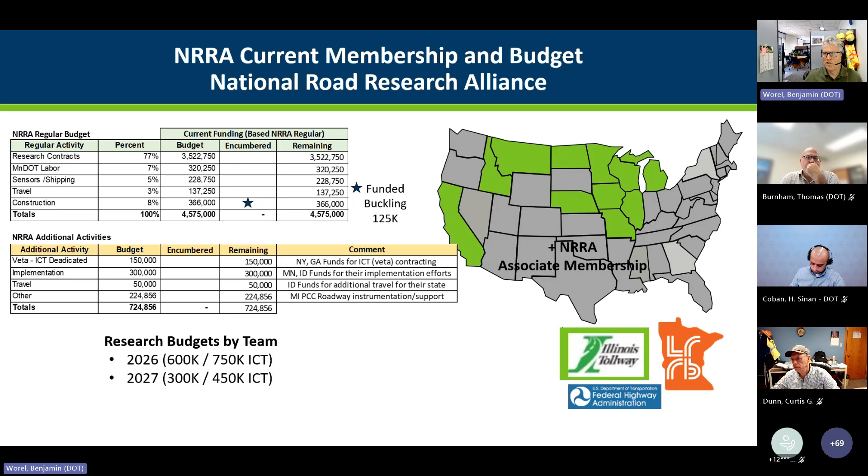These are the ones that we're able to fund with the money we have. Again, we have limited funding, so we can't fund everything, but we're funding quite a bit of things. So we'll go through that today. The ones that are not on the list are being held back again for maybe this spring to be funded at that time, so some of we weren't quite ready to do, either timing wise.

So we're just presenting what's going to be going out for RFP type of contracting. But again, the executive team is going to be reviewing these August 4th. And I think since the chairs have done such a great job, I'm not sure what they're going to argue with here, but we want to talk about other things. August 4th we'll have a meeting for these topics, but also other topics like I mentioned.

So basically, again, we're developing the ideas, the needs if you want to call it. The proposals basically come August, there'll be an RFP advertisement being sent out, so at that time different universities, consultants, whatnot can look those over and see if they're interested and want to put in a proposal on those. So we're giving the universities about 4 weeks to get the proposals in. Come September 18th, they're due.

So with that said, here's kind of what we'll be talking about today.

I think these numbers are right, it's funny how it's hard to count numbers, but you're going to see a lot of high mod reflective cracking over asphalt and concrete. You're going to see some structural design of high mod. I think the 2020s is the decade of high mod. It seems like here for NRRA, but it is a good mix, and Kurt will talk more about that.

And then some innovative mixes that we're still holding out for 28. Some of the sections we're holding out for 28 because those sections aren't quite ready to be done yet. We haven't seen the cracking that developed, reflective cracking for example, in some areas, and the recycled materials.

We're talking about doing high mod on shoulders to get some additional tonnage. We're talking about concrete. Tom will talk about different ideas related to how many dowel bars you need. Can you reduce those? Can you use smaller diameter dowel bars? Different alternative cements. There are still different materials out there that we'd like to try.

Tom's favorite one is the windmill blades. He hates them, he wants to grind them all up and put them in concrete, so more power to him. And then concrete recycling, how do you take a road and recycle that concrete back into a road, both in the concrete and the base? Geotech has really been talking about drainage systems.

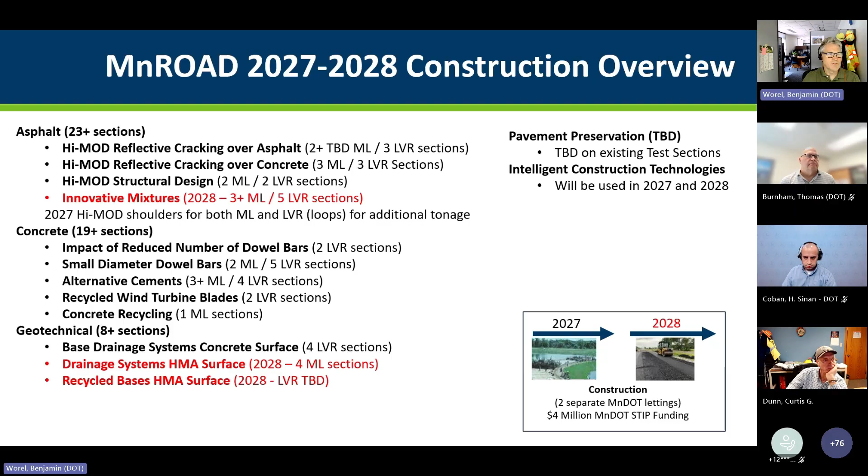Yes, any questions or anything I missed from the chairs? I think the next slide gets into the flexible team and the Kurt Dunn show.

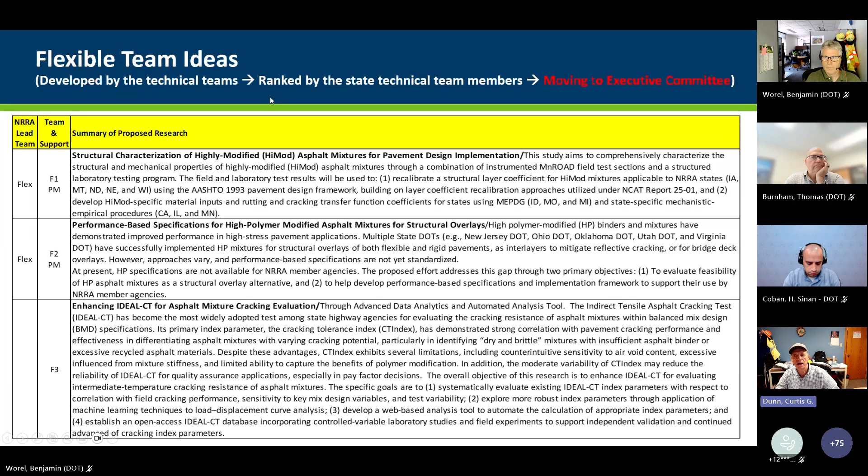So if you want to go to the next slide, Ben. The first slide here is basically dealing with reflective cracking with the high mod. We've got 2-inch, 3-inch, 5-inch, and 4-inch overlays that will be put over 4 sections in the current reflective cracking study that are going to be milled up, and we're going to put these overlays over those areas. They're about 450 feet apiece, and that would be the first segment there on the main line.

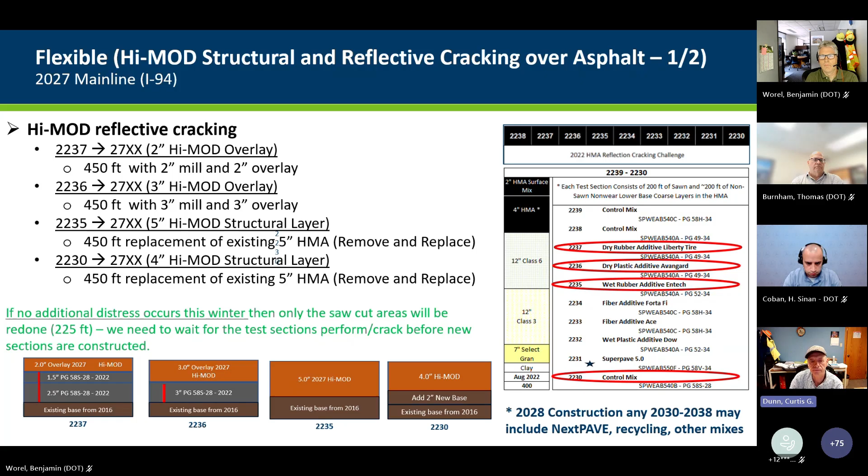Let me go to the next slide. And Michael, please, if you've got something to add as we go through here, go ahead. So the second slide here is high mod reflective cracking over asphalt and concrete, 2-inch. Mill existing and replace with 2 inches of high mod in that area, and then a couple of 1-inch sections over open graded friction courses. So one will be over the existing PCC, and another over existing HMA.

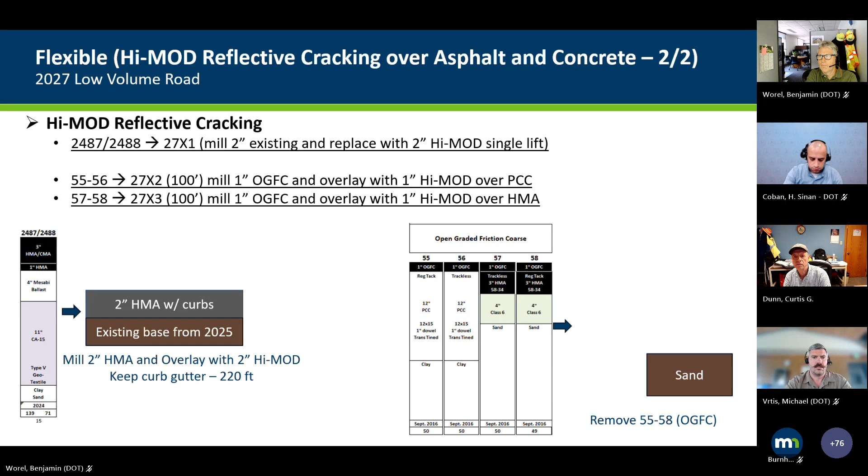Next slide. Okay, here's one on a low volume road yet. So here's some mainline overlay on mainline concrete, some 1-inch, 3-inch, 2-inch, as you can see, and then over to the right there, high mod on low volume road over the existing concrete there, 1-inch and a 3-inch.

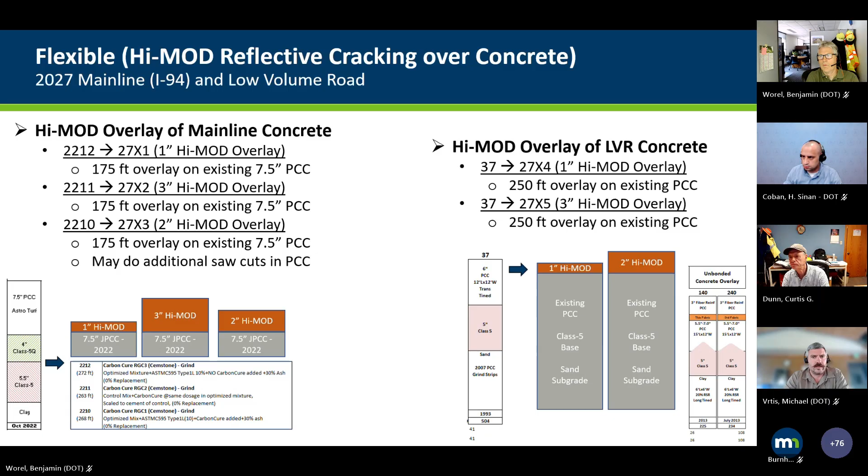Next slide. And then we've got some structural overlays as well. So we've got 4-inch over existing and replace with 4 inches of high mod single lift, and then mill 4 inches and replace with 3 inches of high mod single lift, and then the third one there, mill 2 inches existing and replace with 2 inches of the high mod single lift, and those sections.

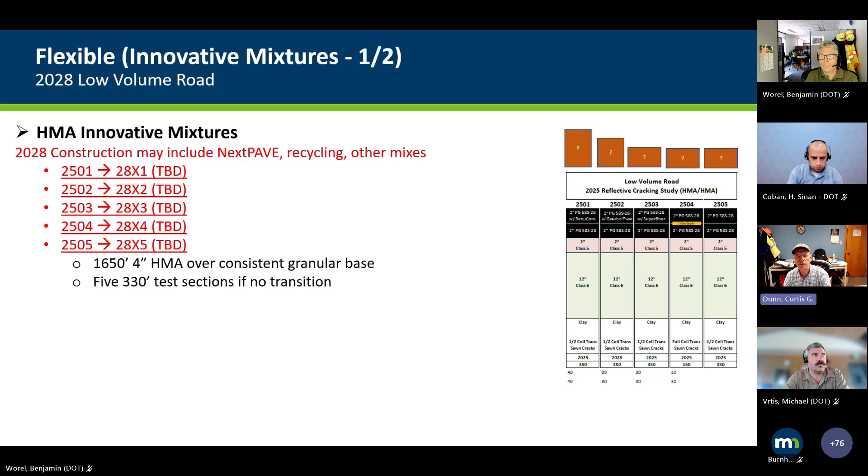So next slide, and then these are, as Ben mentioned, the innovative mixtures that could possibly go in 2028, which may include next pave, recycling, and other mixes. Next slide. Here's some more flexible, innovative mixtures again.

So these are on the main line as well. I guess we don't really know what the innovative mixtures are yet, but Michael, have you got any more you'd like to add?

No real clarifications or refinements. You did a really nice job marching through all the test sections, Kurt, and the design ideas. Just want to emphasize how we arrived at doing high mod next year.

The high mod 2 idea submittals were clearly the highest ranking ideas from the Flex team and the PM team. The overall urgency of the topic led us to push for construction in 2027 ahead of 2028. Both ideas we received were quality but had a separate focus, which spurred us to get a PM-specific deliverable and overlay focus, and a flexible team-specific focus on structural characterization and thickness properties.

Using the available interstate sections and low volume road sections, we're looking at doing that next summer instead of 2028. MnDOT and other agencies are having to face these design effort and challenges right now anyway, so with the NRRA we want to help with the initial design of the high mod mixes for agencies as well as the MnROAD construction effort.

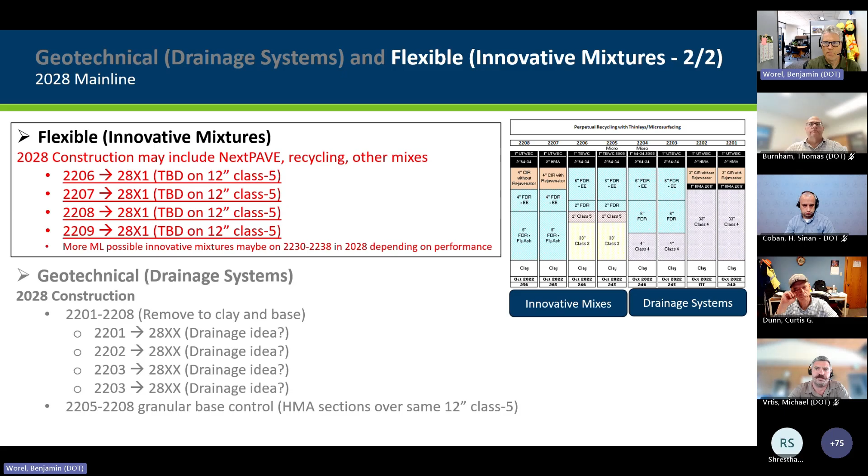Okay, thank you everyone. I want to repeat Kurt's thanks to all the NRRA members that submitted ideas. We got a plethora of them, both from states and associates, and we appreciate that. Double thanks to the state agencies that were under a tight timeline on how I handled this. Since we're under the gun to get ideas for construction next year, I asked for two rankings: one was what kind of test sections should we build, and the second was what kind of research should be associated with that, or other concrete-related research that's non-MnROAD that you're interested in. We just finished up the second round of rankings.

So again, I thank everyone at the state agencies for the very rapid turnaround we asked for. A couple general themes came out of this. You'll see studies related to dowel bar design - it's been a while since we've looked at that, and there are people with ideas of maybe being more economical or efficient with them. There's a theme of replicating experiments from other facilities, so you'll see some test sections related to that. That's a phenomenal thing - it's something the Flex team has been doing for a long time with NCAT, but it's nice that we see the rigid side now comparing similar sections in different climates. We have a continuation of alternative cementitious materials - they're still interested in new materials coming out to address lower carbon materials. And finally, a bit more on the recycling side, so you'll see some sections related to recycling.

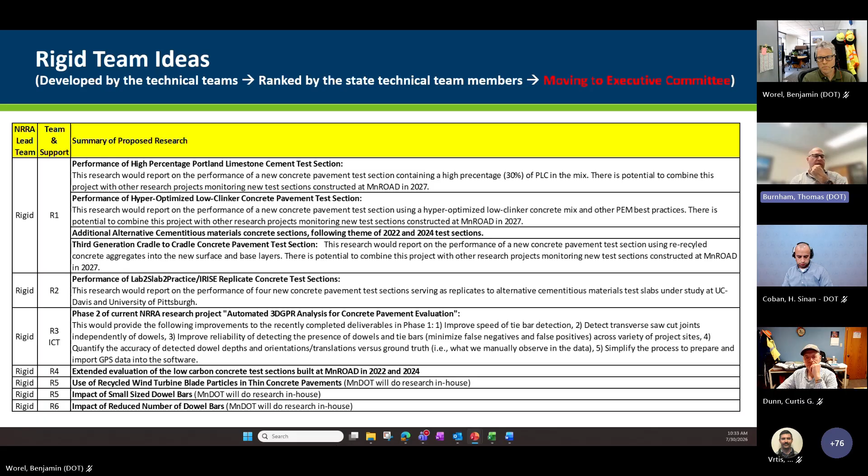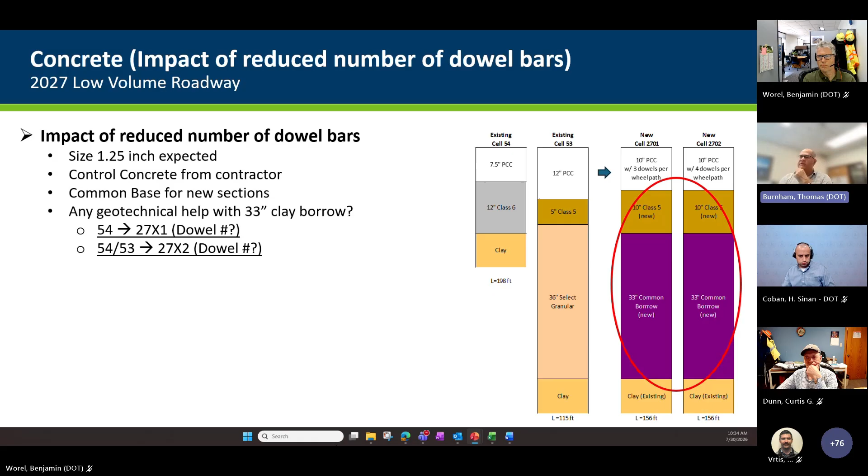Next slide, getting a little into the details of the test sections. Here I talked about the Wisconsin study—pretty robust sections—but again, we're trying to replicate what they're studying at the university in a smaller accelerated load testing situation.

Then again, the smaller diameter dowel bars—we're proposing a number of sections, shown at the bottom of the slide here. So again, just 6-inch pavement and really going small. We're talking about 1/2 inch, 3/4 inch. Do they work? Are we oversizing our dowels forever? Now that they're less corrosive, we have corrosion-resistant options—can we get by with a smaller dowel bar that's going to survive and not rust through?

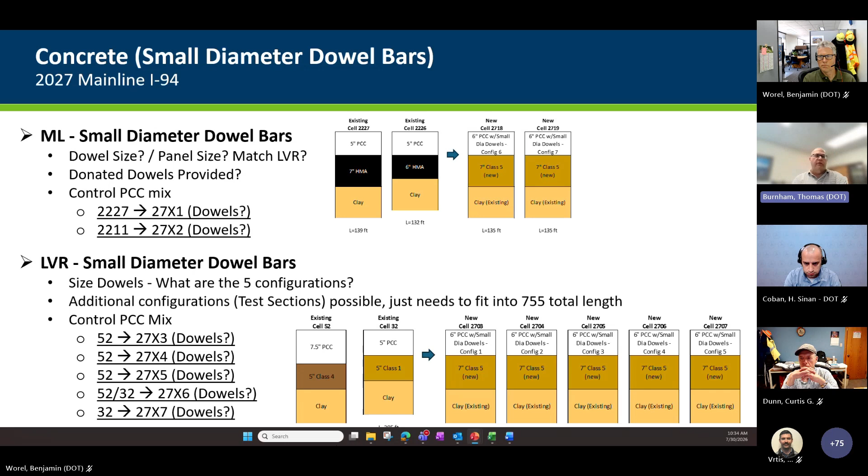And again, we're proposing that both on the low volume and then also very short sections on the main line, so we can compare heavy duty loading versus the MnROAD truck.

Then again, we're talking about alternative cementitious materials, and this is where we can do the lab-to-slab comparative replicate sections. UC Davis has some sections out there—we're going to replicate them here. The University of Pittsburgh is interested too, and they've done a number of lab studies; they'd like to have the slabs looked at here. So we have some of those sections on the low volume.

And then on the main line, again, we're looking at more new alternative cementitious materials. There's a new list out there, and we can choose from them. It's still up in the air whether we'll need to replace any of the sections we don't feel will be robust enough, so we're exploring—there's an unknown number of cells, is it 2 or 3 or 1? We don't quite know, but we have to decide pretty quick.

Again, recycled wind turbine blades—just going to propose comparing to the other sections that were out there when we were using more standard fibers. The 3-inch lasted maybe about a year; just to keep it in service we overlaid it, and about 7 years later we had 4 inches that lasted. So I'd like to replicate the robustness with a direct comparison between a 4-inch structural fiber from a manufacturer versus what this ground-up windmill blade will do. Hopefully it's a good experiment.

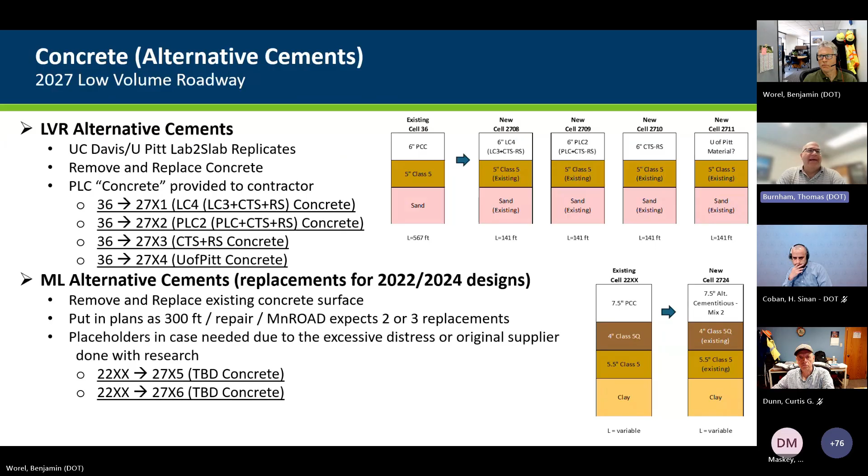Yep. Hey, if you go back, so one is a 30% Portland limestone cement, right? Another one is a low clinker cement. So what is the difference there? Looks like the same to me. I think it's the next one, Ben. There we go.

Yeah, we have to, because you are working with reducing clinker, right? You are replacing with limestone, right? Yep. So this was submitted by Iowa State, and I think they have some ideas. We have to work with them to define what the hyper optimized low clinker design looks like, but it will be different than the high PLC design.

I think a lot of the stuff you see here is just trying to figure out what real estate we have, and we still have a little details to go, like Tom mentioned. That'll probably be further discussion with the rigid group as you go. Is it something you would like to be involved in, on the TAP, to help understand and decide?

I'm looking from a sustainability approach. We are trying to reduce clinker, and technically you are using high limestone content. Technically, we're trying to reduce clinker, right? So I was looking at it a little differently.

I think the third one, the high PLC concrete, what that really means when it was proposed was 30% limestone content - not 30% 1L, but 30% limestone interground within the mix. That's what the third bullet is supposed to represent, versus taking a whole bunch of paste out, which is what the first bullet represents.

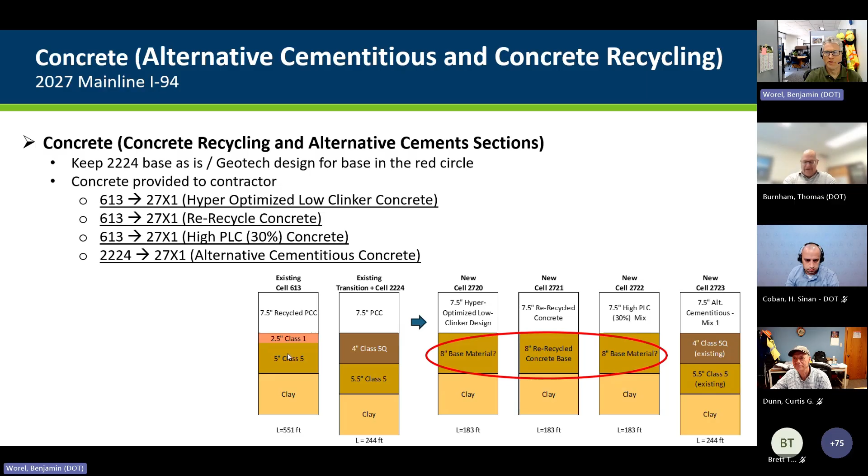Yes, all right. I'm going to just chime in that with 30%, I don't know if you'll be able to get there. Right. But they made the 20% for us also, Dan, when we wanted that. So if it's something we want, it could be considered.

But there's also 1Cs, and Nebraska's got some mixes out there that are going to be higher - the LC3s and the L2s. You're trying, in that top one, to replicate what was already built in these other states, right? So those aren't necessarily new. Some of the low volume stuff is the lab-to-slab stuff, and the Pitt. So we're just building what they built, correct?

Yes, for the mix designs. And then the others, I think that'll be the rigid group - whoever wants to be part of it would be part of those discussions. And some of these mixes too, I think we have a little time because we're going to provide the concrete to the contractor.

We're not going to have them bid that. So in our special provisions, we say we'll get you the concrete, you pave it. But the people are still going to have to test it, so the more time we can give them, the better. You'll figure it out, Maria. All righty, thank you.

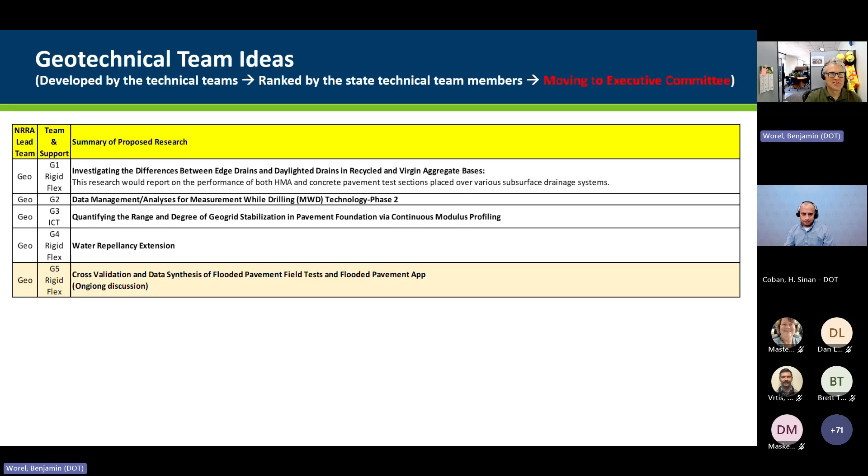I also would like to thank the NRRA members for submitting, reviewing, and ranking research and construction ideas. In total, we had 26 geotech-related ideas to review and rank. In this round, we selected 4 of them. G1, G2, G3, and G5 are selected for contracting in 2027. G4, water repellency extension, was not on the ideas list, but it's a cost extension request for the ongoing water repellency project.

There are some other ideas that also ranked high, but we have decided to postpone them until the additional $3,000 becomes available. So in the next 5 minutes, I will give brief information about these ideas.

The first one, G1, investigating the differences between edge drains and daylighted drains in recycled and virgin aggregate bases. This research will compare edge drains and daylighted drainage systems, and will also include the use of coarse and fine base layer aggregates, with 4 test sections - 2 drainage systems for each aggregate type, but the number of test sections is subject to change depending on the size of the area available for reconstruction. The main goal of the study is to evaluate how drainage design and base aggregate type affect drainage characteristics and overall pavement performance.

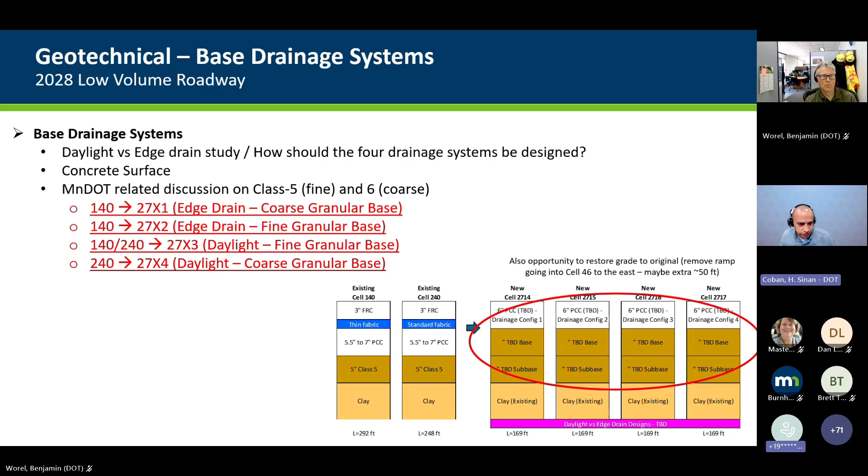So if you do it in 2027, we can use these two test sections, 140 and 240, to construct four new test sections. As I said, we will use coarse and fine base layer aggregates and two different drainage systems, but depending on the size of the area that's available for reconstruction, we may change the number of test sections.

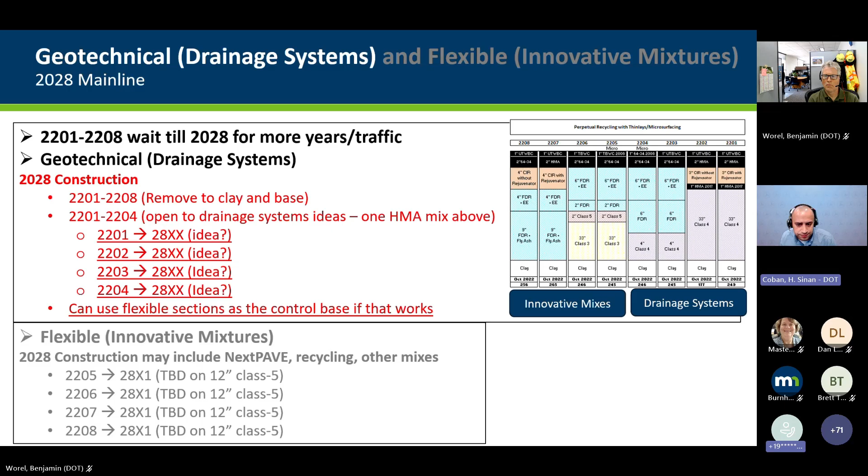If you do the construction in 2028, we can have 4 test cells to construct new test sections, and those are 2201, 2202, 03, and 04. These sections can be used to try different drainage systems and different base layer aggregates.

For the GeoGrid study, we can use test cells from 188 to 728 to create new test cells with different GeoGrids and instrumentation. Another thing we can try is using different RCA and RAP mixtures with different RAP and RCA proportions. I didn't include it in the ideas list I showed previously, but there was another idea submitted about increasing the RAP content in the RCA-RAP blend. Maybe that idea can be incorporated into the GeoGrid study test sections.

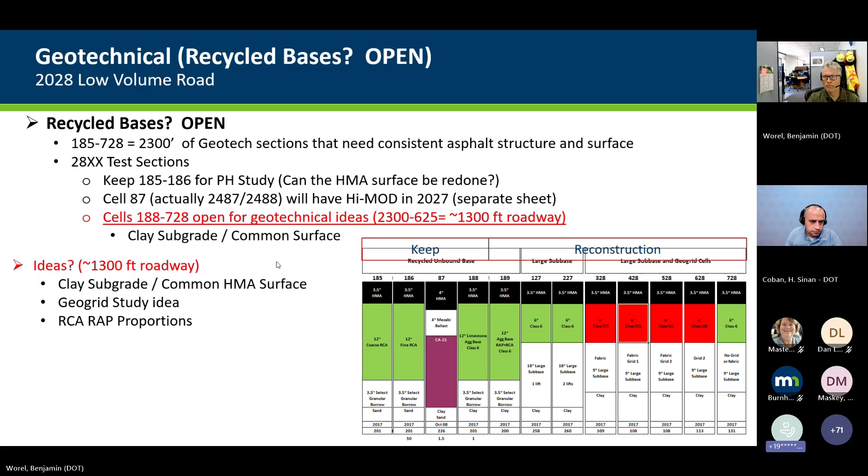Yeah, this is G2, the data management and analysis for measurement while drilling. We are in pavement foundation, looking very shallow. So why do we want to go there deeper?

My question is, I think we should focus on only the pavement section, not real geotechnical or bridge design topics. I think we did step away from traditional pavement research in this area because the geotechnical team members were really interested in pursuing measurement while drilling efforts. We've continued, but that question has been asked. We did do phase 1, and now it's getting proposed with a lot of support for phase 2.

Sinan, I was going to mention when we're done with all these, this will go to the executive committee. You probably noticed there's no dollars shown here. We didn't show those because the executive committee will look at the topics and the budgets that are set and see if they're appropriate. So hopefully that helps, Deepak. Thank you for explaining that.

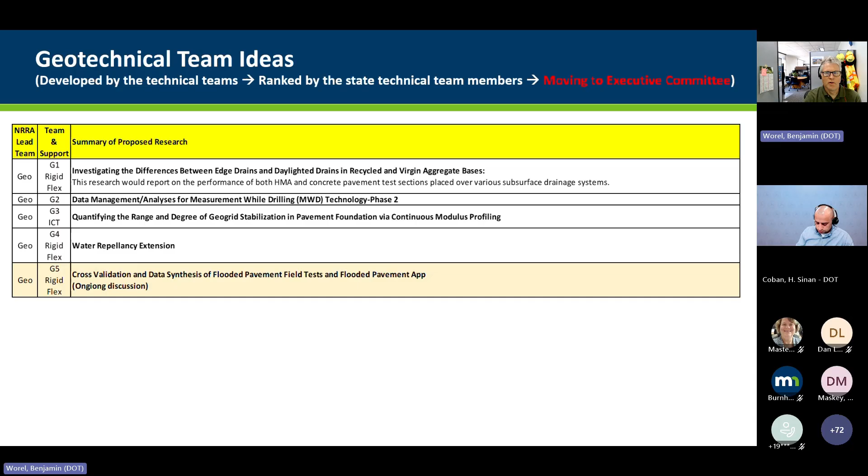All right, well, I'm going to zip through, there's only a couple slides left. Let me make sure I got it right. So Ashley, are you on board? I'm not sure if she's on board or not. Online? Are you here? Are you not present? I'm not on board. Okay, you're not on board. All right, so you only have one slide here.

Michael and Kurt did a great job covering the high mod. I think a lot of the folks in the PM team will be excited to see some of those 1-inch, and then also tracking the performance of the 2-inch high mod section. Those will go toward better understanding that material for preventative maintenance treatments. So we're excited about that.

And then for P2, this was a combination of a couple different ideas. They all rolled into the same overarching need for making sure we have high durability microsurfacing treatments out there. The big parts to this research are making sure they're going to hold up to snowplow and not delaminate over time. Delamination or sudden delamination can cause problems.

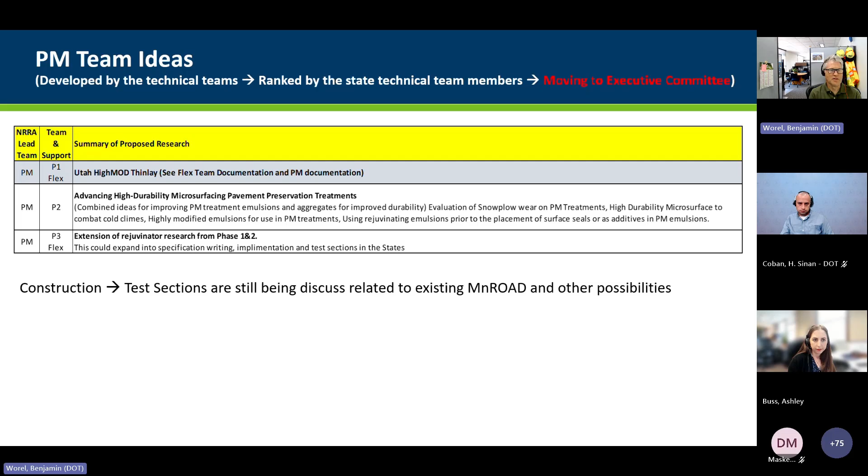Any questions for Ashley? Oh, you got off easy. I did. Thank you. All right. Thank you, and Mike, if you would take this and talk a little bit about it.

Yeah, certainly. So for the intelligent construction team, we received a number of ideas, a number of VetaCenter enhancements. Just history wise, there's a desktop version and we're moving to a web-based version, and there's a number of enhancements we received and put in a list. They haven't been ranked, so to speak, but this is just an overview of the general list we had.

I did group it by general software updates, which could be across several different technologies, and also some that are somewhat more specific to a technology. So I have dielectric profiling system related enhancements, and then e-ticketing, intelligent compaction, paver mounted thermal profiling, just in case folks are not used to all the acronyms we have.

Related to this, none of these were tied to the 2027 MnROAD construction. I know a lot of folks on the prior teams had rankings, construction, and commitments to specific test cells and everything else. But since we didn't really tie much into that, our timing and priorities still need to be sorted.

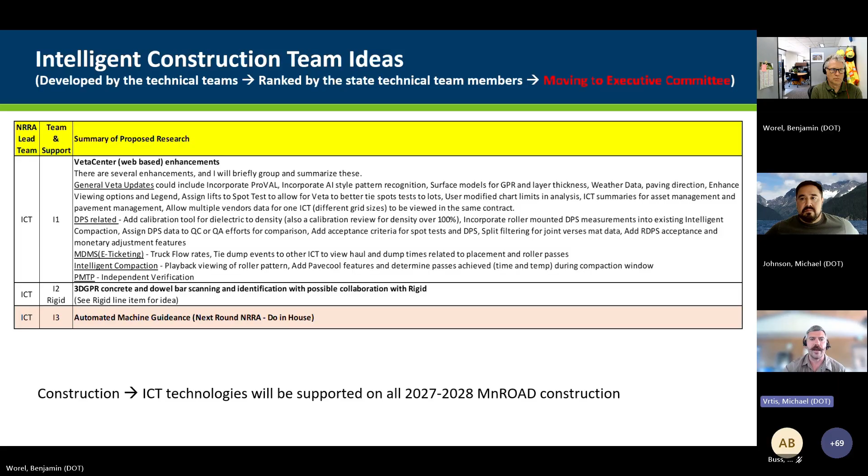Can I just add that we've had discussions about incorporating all of these technologies, not from a research level, but using them with everything that we build at MnROAD, because they're extremely valuable for our forensics or characterization efforts, construction monitoring. So we've talked about making sure we have all of these items in our construction letting and are able to work with Mike and the ICT team to get that information for the MnDOT projects, whether that's IC testing on the granular layers, or getting DPS on the asphalt surface, or paver mounted thermal profiler, regardless of the tonnage. Everything we do here at MnROAD, we're making sure we're using the construction tools as much as we possibly can. Thanks.

There was a question asked of us yesterday too, with respect to e-tickets and whether we'd be able to use the technology for concrete as well out at MnROAD. In Minnesota we are piloting concrete e-tickets for next year for 12 projects. So that's very well something we could do out at MnROAD to help ease construction. We just need to know ahead of time if you guys plan on incorporating that, so we can reach out to the associations and let them know to plan on using that technology at the MnROAD construction project.

I think I kind of touched on it, but the list looks short in a way, because there were other ideas that ICT was not the lead on, and certain topics were just not selected by flexible, geotech, or rigid. So I let that settle out on the other teams. As far as collaboration, we currently just have the one for this first round, and we'll see how the next round goes when we get more into bituminous.

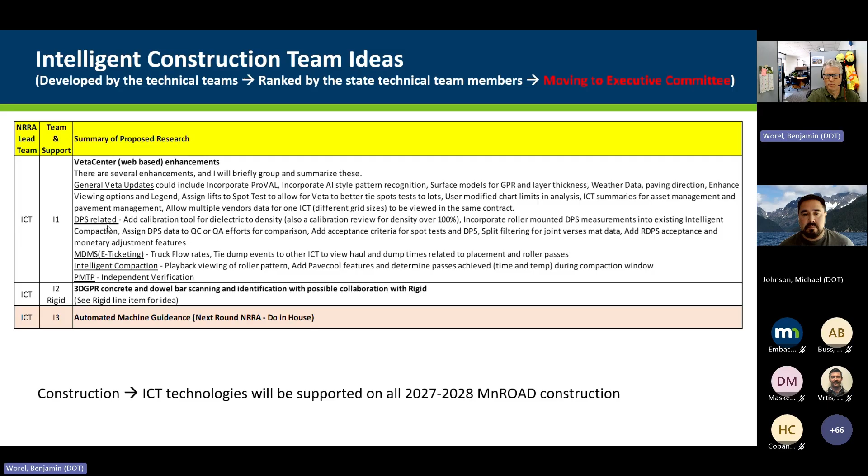Sounds good, thank you for the update. With that, that brings us to the next slide. The pictures got kind of blurry, but again, if you've got questions or comments, send them to me or to any of the chairs.